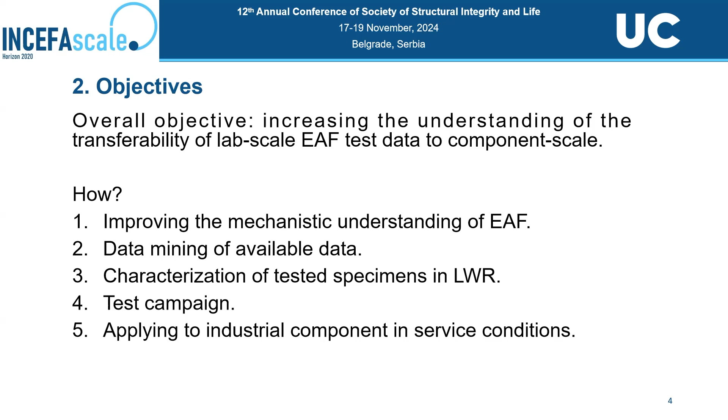Well, the justification for this project is like 10 years ago, with these gaps that were reported by EPRI. And the plant realistic SN data, with complex environment data to support the method, strain gradient, and data science. And there was another open question about the component scale testing. And this is a topic not only in Europe, but we have many other different projects that are dealing with the same issue. That is, we have similar projects in Japan, United States, and other particular topics in France and Germany, and of course in the United Kingdom.

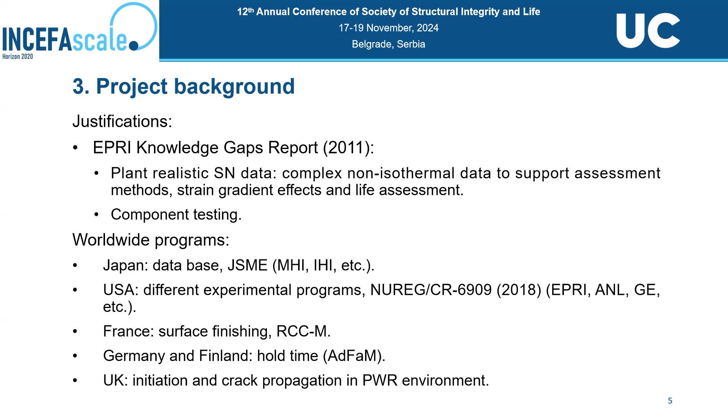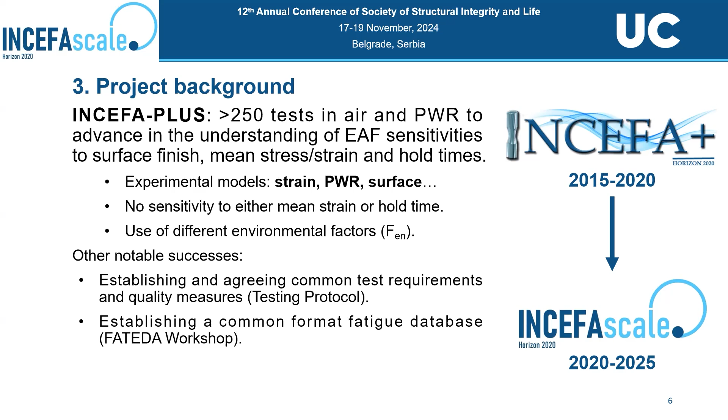As I said, this is an open topic that comes from many years ago, and this INCEFA-SCALE is our second step in this study, because we have this previous project called INCEFA+, where we performed more than 250 tests in air and PWR environments to advance in the understanding of environmental fatigue. So in that case, we were focused on strain, the effect of the environment, and the surface finish. One of the results was that we don't have this sensitivity either to mean strain or to hold time. We performed this specific test, and we got some different environmental factors. Another success was establishing a common testing protocol for all laboratories in the project, which is an important point if we want to compare different results. And we established this common format for fatigue data.

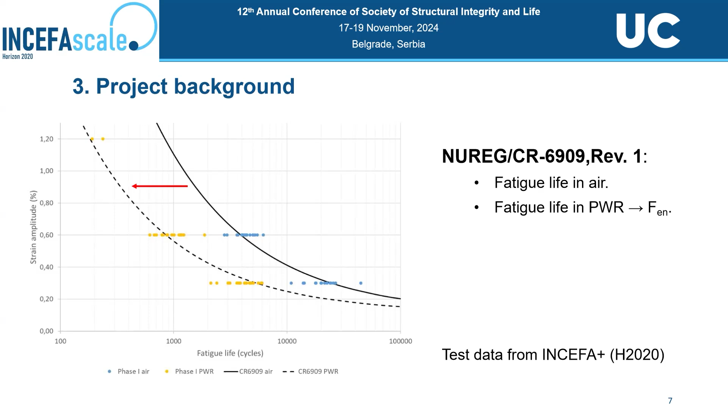What are we studying? So we have this NUREG/CR-6909 as a reference standard. It studies the environmental effect in metals and water. So what this standard provides us is the fatigue life, that is the black line. And if you apply this environmental factor of 10, you get this reduction in the fatigue life, that is the dashed line. And what we support and observed in the previous project, and it's one of the hypotheses, is that the factor could be too conservative. So we can adjust the factor to get higher fatigue life in real components.

Well, in our project INCEFA-SCALE, we started with a study of the data sets related to fatigue. And we collected different data from many projects and many institutions. This previous study got the data from INCEFA+, the utility in Finland, US NRC, ANL, and EPRI. With all this data from different institutions, we identified these gaps to cover in the framework of INCEFA-SCALE. For testing in air, the effect of temperature appears to be bigger at low strain ranges. We found this lack of data at low temperatures and at low strain ranges. And in the case of the PWR environment, the effect of surface finish appears to be bigger at lower strain. We identified another lack of data in the significant low strain range with rough specimens and also at low temperature, and the waveform appears to have an effect on the fatigue.

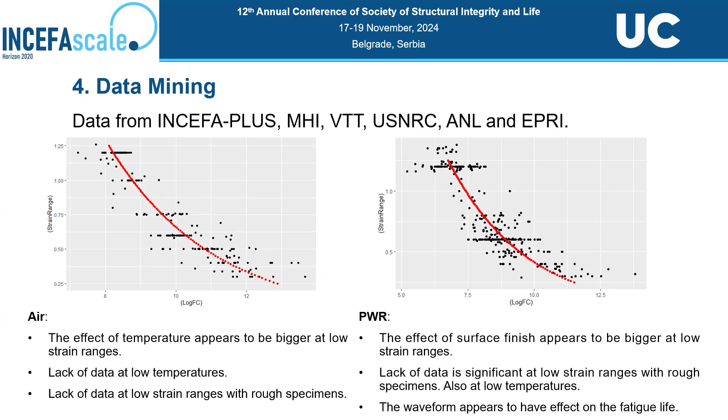So, continuing with this data analysis, we started this independent project called International Fatigue Database, which is going to be a collaborative platform for institutions from around the world. And we want to achieve common conditions or common data from this analysis of fatigue. So up to now, we have almost 5,000 data points. And in our case, it's interesting because INCEFA-SCALE has the largest population. So what we are learning with this project: to produce more solid and reliable predictive models. New fatigue data we obtain through some knowledge graphs, and new evaluation tools are available for future evaluation.

Well, in the test program, we have these hypotheses to investigate. The modified Goodman mean stress correction is already providing significant cover for the effect of transitional mean stresses from variable amplitude loading. And this is the reference for NUREG-6909 with a value of 1 or 2.

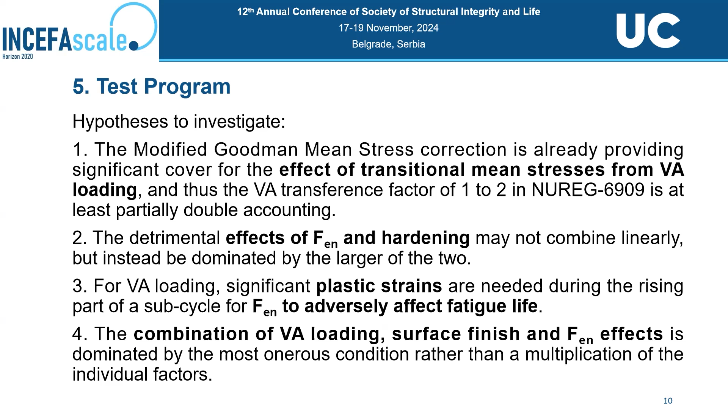The detrimental effect of fatigue or environmental fatigue factor and hardening might not combine linearly, but instead can be dominated by one of the two. Variable amplitude loading significant plastic strains during the rising, associated with the environmental factor, adversely affects fatigue. And finally, the combination of variable amplitude loading and surface finish also has an effect with the environmental factor.

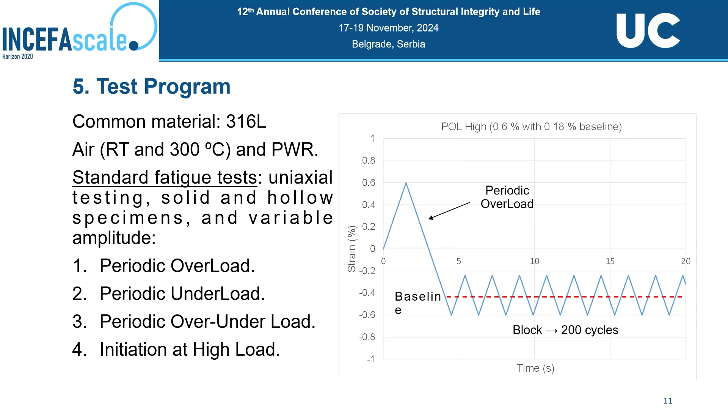To cover this topic, we perform this kind of test with different variable amplitude. So in this case, this example is for a periodic overload, and we use this common material in PWR, 316L. The test was performed at room temperature and 300 degrees and PWR environment. We perform this following the previous protocol I mentioned and the standard fatigue, and we have periodic overload, underload, over and underload, and initiation at high load.

Well, the current status for this test campaign is we finished the first phase of this campaign. We have different specimens, solid, hollow, we have different environments like PWR. And up to now, what we have shown is that with this periodic over and underload test, we have this effect on the higher fatigue life. So we have this influence on the fatigue environment.

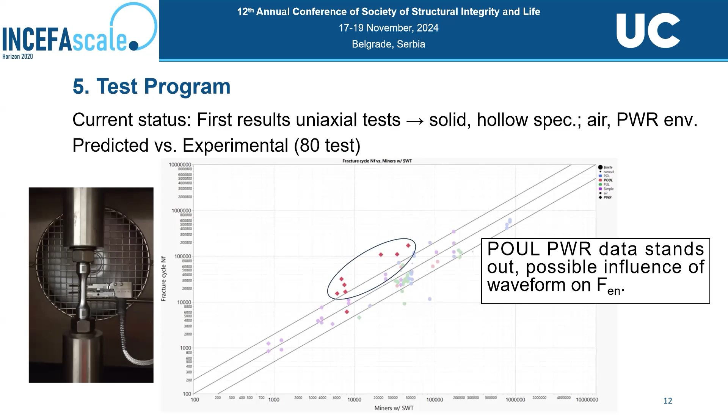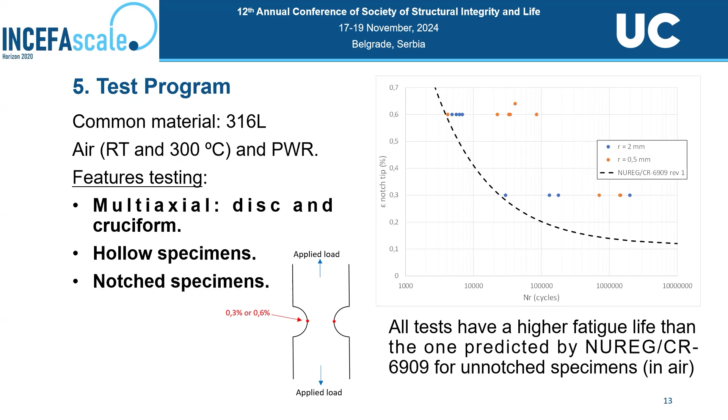But we are performing another specific test that could be used for the industry and for studies: component scale tests. And in the same condition, we are studying this in multi-axial, disc and cruciform specimen, hollow specimen, and notched, which is quite common in components. So we have to look for the definition of strain at the notch tip, and we are applying this strain in the environment. So up to the moment, all tests that we performed have a higher life. And okay, now we are reviewing this strain measure in case we have made any error.

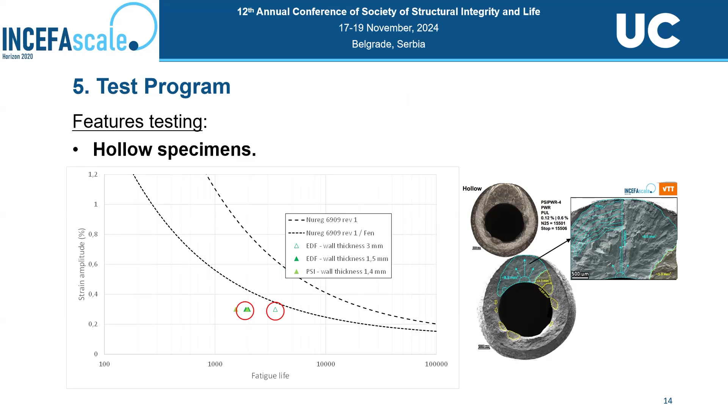Just to mention another kind of specimen that we are testing is this hollow specimen, where the environment is in the inner part of the specimen. And in this case, it is similar to a pipe in PWR. Of course, we have this higher life. So it's in the same way that we think that this environmental factor is going to be restricted.

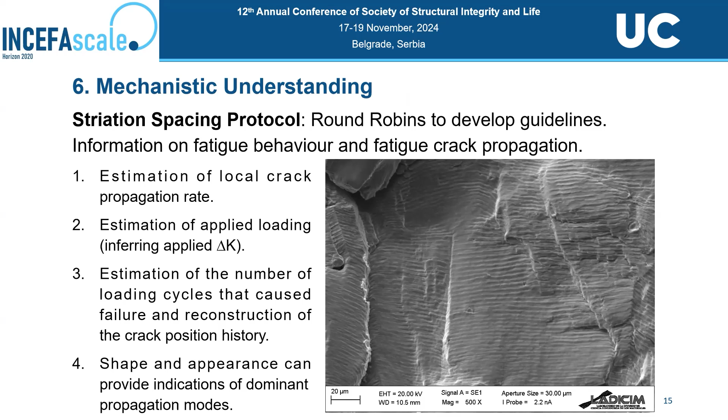Another important topic that we are performing is the mechanistic understanding by analyzing the fracture surface. So what information are we going to get from this analysis? Estimate local propagation rate, estimation of applied loading and the stress intensity factor, estimation of the number of loading cycles that caused the failure, and reconstruction of the crack position history. And the shape and appearance can provide indication of dominant propagation.

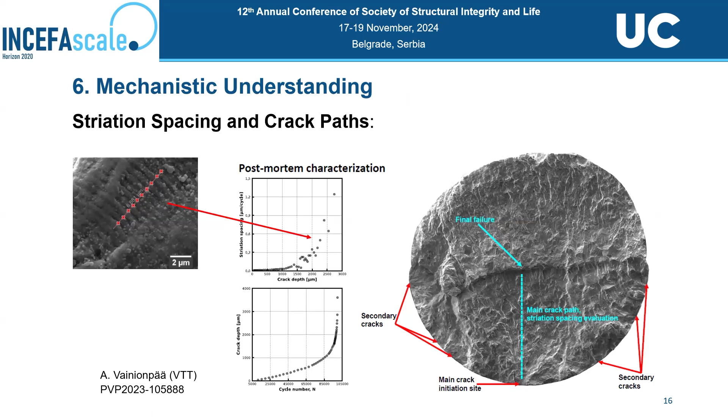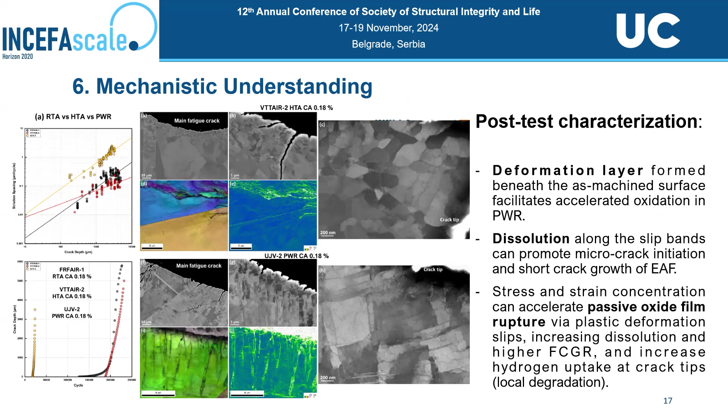So what we are achieving for now: we have this strong collaboration with NNL that should lead to study all these phenomena in a component scale test. We have this data mining activity, and we have founded this international fatigue database. The testing protocol and the testing campaign are already going on, and we have many results now in INCEFA-SCALE. We have defined the testing of hollow, notched and multi-axial tests.

Modeling is going to be supported by the analysis of fracture surface. We have this analysis of crack growth rate and stress intensity factor, and we have the application. We are studying how to apply this knowledge to an industrial case and any other standard, for example.